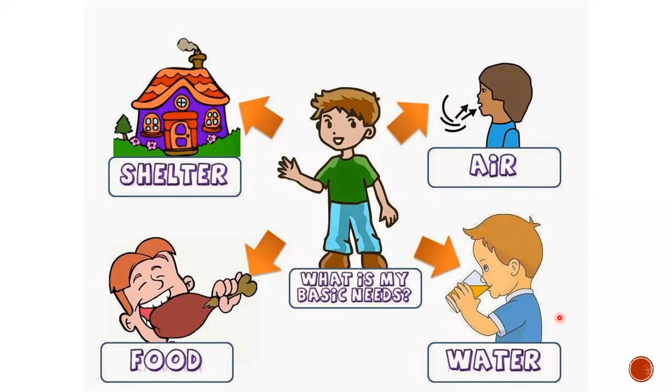Initially we used to have load-bearing walls and thatched roofs which cater to at least 4 to 5 people. Now, on the same place, we are doing multi-story and high-rise buildings which cater to a much bigger population. So when I talk about density of population, in initial stages it was very less, and the shelters were very different. Now, with the increase in population and advancement in industry market practice, the role of shelter is going to play a major role. So how can a structural engineer help people or human beings achieve this basic need? That's what this presentation will talk about.

Coming to the overview of structural engineering: what is a structural engineer? What do we do? What do we design? These are the three topics which we are going to cover in this presentation.

What is structural engineering? Engineering is basically the mathematics of any design. It might be structures, it might be electrical, it might be mechanical. Every engineering discipline is nothing but the mathematics of design.

Coming to the basic need of shelter, there are four people who play a major key role in getting things executed. First, the architect is the one who visions or perceives the ideology of building any structure, bridge, or monument. So the architect is where the vision starts, and next comes the engineer, who adds the mathematics to the design and then makes it executable.

Next comes the coordinator, who coordinates between the structural engineer and the architect, and the marketing person, who actually sells your idea. So it's not always just about building your idea; you need to sell it. Doing a number of buildings doesn't serve any purpose. You need to build with a proper vision, proper mathematical design, and then sell your idea so that your building gets sold to the required population.

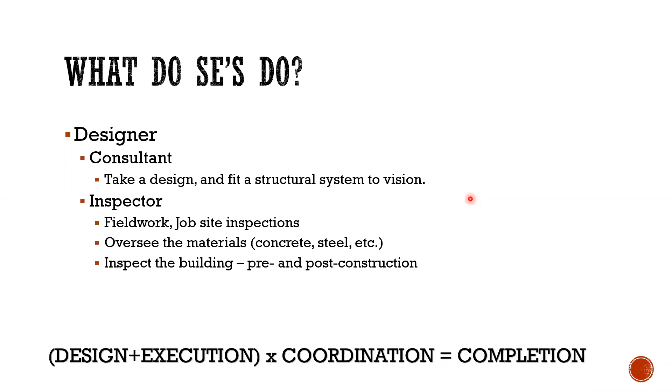So what do we design? As I told, we get the vision from architects, and then we start quantifying the loads based on the vision, then estimate the material capacity. Material capacities are properties of the material, and loads depend on the vision given by the architect. The main part of structural engineering is to correlate between these loads coming from the vision and the estimation of material capacities. For what load, what material is required, and for what material capacity, how much load we can take. It's a balancing between loads and capacities that a structural engineer always works on.

And altogether it's about a safe and sustainable environment. We need safe structures and sustainable structures which have a life of 50 years or 100 years depending on the importance. When I talk about sustainable, it refers to the life of the structure. It should not happen that I build a structure which is safe for 1 year and after 1 year it is no longer valid. That should not be there. It should be safe and it should be sustainable also.

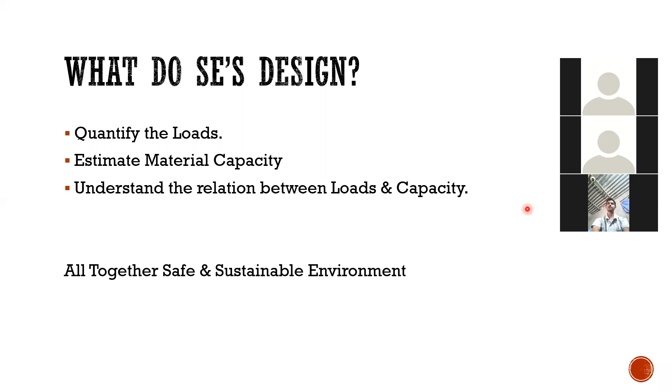So when I talk about loads, let's go a little brief into loads. The estimation of loads and the estimation of material capacities is what majorly a structural engineer does. Coming to the type of loads, we have many types. You may already be aware of point loads, UDL, UVL, uniformly varying load. I'm not going into much detail of this, just a brief of what the types of loads are.

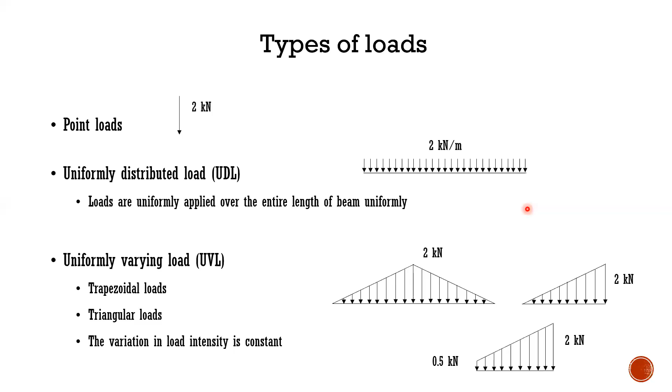Loads are nothing but applied on the structure. Coming to forces, what is the difference between load and force? Load is the thing applied on a structure or a member. Coming to force, what is a force? It's actually the resistance created. When I'm applying an actual load, if there is any resistance, then the force will be created on the member. So it's actually resistance created on the member.

Suppose I'm applying load on a chair which is having wheels mounted. What happens? There won't be any resistance, so there is no force getting transferred to the chair. Or if I'm pushing a car which has zero friction between the tire and the road, assume I'm applying so much load, but there is no friction being generated, so there is nothing the car is going to get. It will be moving easily because there is no force getting transferred on it.

Suppose if I'm having a chair which has a wall in front of it and I'm trying to push it, then what happens? The chair will start squeezing itself. That's where the force is getting transferred to the chair. That's the difference between load and force. Load is actually what you apply, and force is what it actually takes. So if I'm applying a load, it doesn't mean the load is always getting transferred to force. Force is actually how much resistance is generated, or how much is getting transferred upon it. That's the difference between load and force.

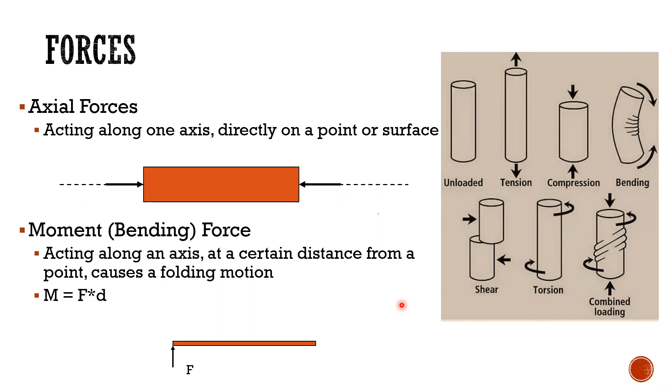Coming to axial force, again tension and compression. As you see on the right side top, when you pull and start making the member elongate, the member will start shrinking at the weakest point, and at peak capacity, it will break. That's how tension works. If you take an elastic rubber and start pulling on both sides, the tension will be created.

If you observe, necking will be forming at a critical point where the element will break. So that's where necking is critical in tension.

Coming to compression, there are two types: collapsing of the element, which means crushing, so the material starts crushing due to the compressing force. That is collapsible failure.

The other way is buckling, which is for longer elements. When you are applying... let's take an example.

What happens is, when I take a block and apply force on the top and bottom, it will start to crush. And if I do the same size block but with a bigger height, before it crushes, it will start bending. This is called buckling.

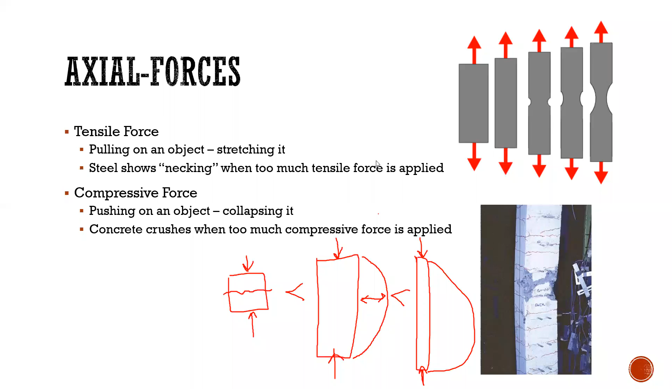So briefing one more time: tension is when you are pulling things away from each other, and compression is when you are pushing things towards each other. Bending is an indirect phenomenon involving tension and compression.

This is bending. When we call it bending, the top fibers will be in compression, pushing towards each other, and the bottom fibers will be in tension, pulled away from each other. So this is the way bending works.

It's an indirect compression and tension where the lever arm generates the bending moment. So bending is slightly different, but it still involves the direct forces of compression and tension. Bending is indirect, where the couple of tension and compression generates the bending - it's a combination.

Torsion is completely different - it's about rotation about its own central axis. That's where torsion differs from bending.

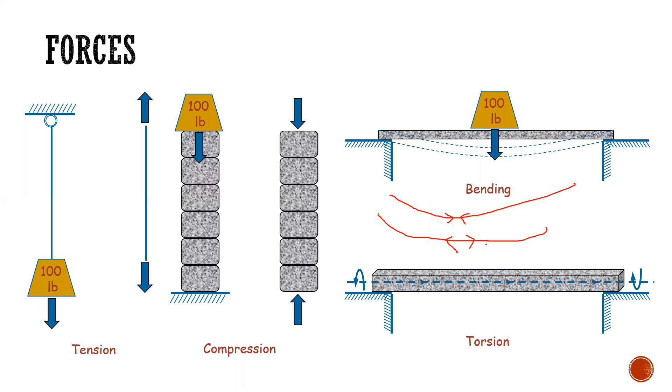So we discussed forces on individual members. Now we'll discuss forces on the overall member, like a building - what are the types of forces? Coming to forces on individual members, there are many types of loads: UDL, point load - those are the types of loads. Now coming to forces, what types of forces can any building attract?

It can be anything, like gravity. When we talk about gravity, it's nothing but the law of motion, the gravitational force - it's m into g, mass into gravitational pull. The g is 9.81, and mass is the mass of the body, any item which has mass.

Static force is again divided into two types: one is fixed static, like walls, floors, thickness, concrete, dead weights - all these are called static force.

The other is dynamic - not dynamic actually, these are changing due to time. It's not dynamic because of unnatural events, it's because of changes with time - people may go there or not, furniture may move from here to there. These are dynamic forces, not related to dynamics with respect to time of the building, but with respect to the life of the building.

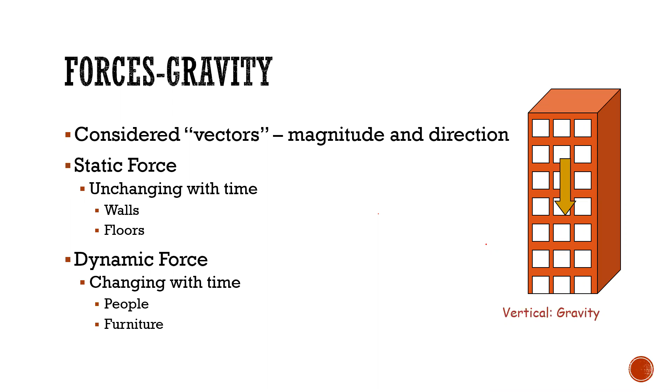Today a building may serve as a residential building; tomorrow it can be converted to office. So the loads of the office will change, but the dead weights and walls won't change. That's where static and non-static forces are different. These are the two types of forces in terms of gravity, where some change with time and some don't, because of the life or usage of the building.

Other forces are unnatural forces, not known to everyone when they will come. It might be earthquake when you talk about seismic, or wind and cyclones when you talk about wind loading. So what is the difference between static and lateral forces? These are actually dynamic, because you don't know when they will occur.

When we talk about static, it's with respect to the time when the load is acting - there is no change in the load. Suppose a man standing on the floor at t=0 and t=1 second, the load is the same because the man has the same weight, so the gravity forces are same.

But when we talk about seismic, what happens is your building starts shaking. Depending on the building shaking, the time period of oscillation depends on the building geometry. But the shaking vibration depends on the natural layers underneath the building - that decides the shaking vibration caused onto the building.

At t=0, it might be 1 kilonewton. At t=1.1 second, it might be 0.1 or it might be 2 kilonewtons, depending on the building behavior or the location where your building is situated.

Zone factor is the one thing we call based on the geography of the India map. They have divided the Indian plateau into 4 zones: 2, 3, 4, 5. Zone 1 was there initially, but that was discarded later after the Bhuj earthquake, so zone 1 is out of the picture.

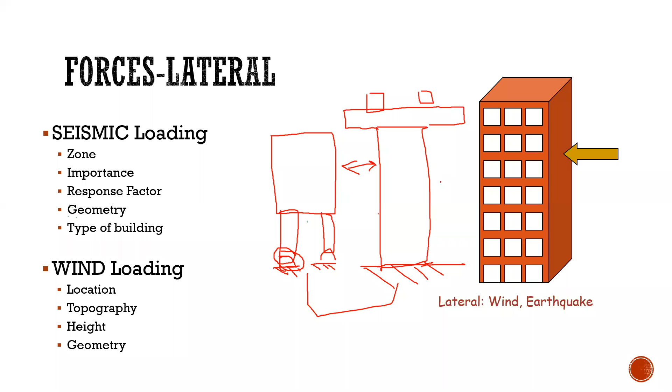So when wind occurs, if you allow it to pass through, there will be no force transferred to the building. That's where I say load gets transferred to force only if it is being obstructed. If it is not obstructed, there is no force transfer. So that's as simple as that.

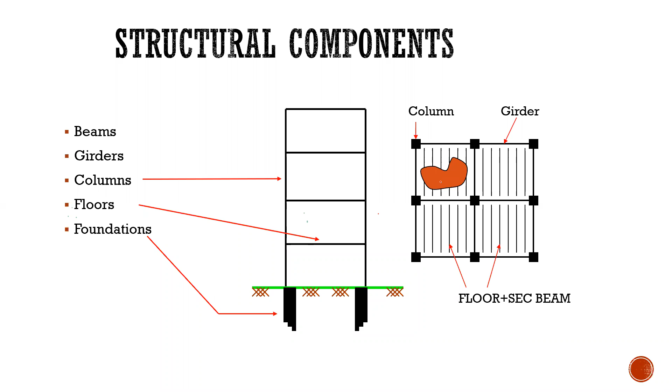So now coming to one building, let's take a small building. What are the types of building components we have? It might be beams, where the first one is slab, and slab is connected with the primary and secondary beams, then primary beams, and then columns, and then load is transferred to the foundations. So these are the typical parts of any building component in terms of structure.

So how is the load path being transferred? The load is always getting transferred from the slab only, since the slab is the one in direct contact with the load. The slab will transfer the load to the beam, the beam will transfer to the secondary beam, which transfers to the primary beam, and then the primary beam will transfer to the columns, to the foundation, and the foundation to the soil. That's how the load transfer mechanism works: slab, then beam, then column, then foundation, then soil. This is the basic load path everyone needs to understand for any type of building.

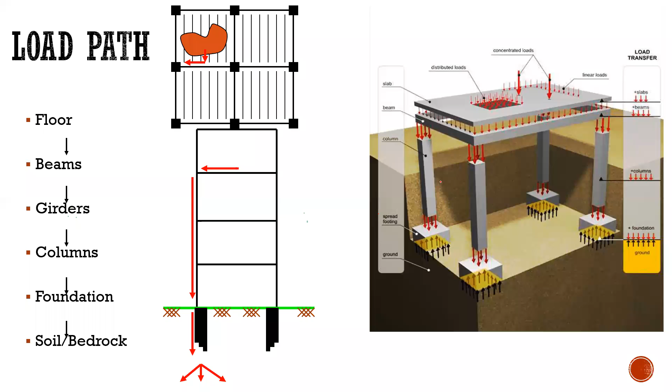So we discussed building loads and everything. Now let's talk about materials. What are the types of materials we can use when building a building? That might be timber or wood, RCC meaning reinforced concrete, or post-tension, pre-tension slabs, or steel structure, composite structure, and fiber reinforced structure. So these are a few types of construction; there may be more, but we'll talk about the main ones.

Coming to wood construction, it is not predominantly used in India, only for aesthetic points where someone wants to create something lavish or beautiful in terms of view. There, wood construction is predominant. In India, we use wood as a finish material, not as a structural material, because of its properties and the quality of wood we have here. It's lightweight, and it's more used in American and European countries because of that lightweight behavior and the aesthetics it brings to a building. In India, its structural use is very low; it's more used as a finish material, like on the floor as wood tiles or flooring, so you get that feel of wood.

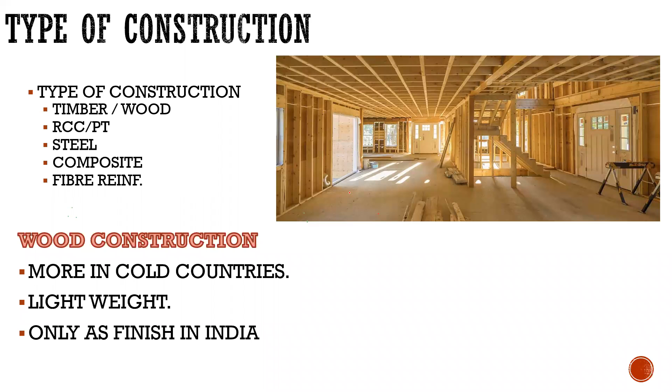This is the predominantly used construction in the current Indian market: reinforced cement concrete, RCC construction, where concrete and reinforcement share the compression and tension. Concrete takes compression and reinforcement takes tension. But this has more weight - when you compare the same structure with the same utility, the dead weight of RCC will be much bigger than all the other types of construction we discussed.

PT, which is pre-tension or post-tension, slightly reduces the weight of the concrete structure, but it's still in the top two. RCC will be number one in terms of weight generated on the soil below, and PT will stand in second place. Composite, steel, and wood come in subsequently, adding less weight on the substructure. So when you have very loose sand or very weak soil, building with RCC will add more weight to the structure, which will kill the capacity of the soil - that much dead weight comes in without any real usage.

The dead weight is so much - dead weight is nothing but what's needed to keep it in place, and you need more of it than the actual load you're carrying. Suppose I take an RCC building with a 150 thick slab - that's ultimately 375 kg per square meter of dead weight. And what is the live load we design for? Say 200 kg per square meter. So I'm designing for 200 kg per square meter of live load, but my dead weight itself is 375 - almost double the actual live load I'm designing for. This is meant to provide for live usage like people's furniture or anything, but the dead weight is so high that the live load becomes very nominal in comparison, because of the RCC dead weight we get.

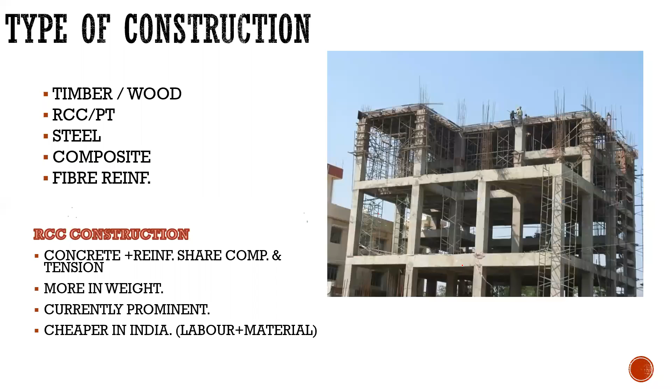Okay sir, so in India there is one more component before we talk about labor and material: time. India is more focusing on time now, because when we talk about RCC, one slab will take suppose 20 days, but when you talk about steel structure, it will take just 4-5 days to erect. So that's where the time component gets added. When I talk about labor, material and time, India is now cashing on time, because India wants a quicker building due to market requirements.

Like if I'm building a commercial complex where my rent is much bigger, then the time factor comes into the picture. I want the building faster than spending money on steel or composite, because then comes the effectivity of time.

When we talk about labor and material, those still remain as labor is cheaper and material is costlier in India. But the time factor is where I can sell my building much quicker. Like if I'm doing steel construction, I will sell my building 3 months in advance, but the cost of steel structure is 1.2 or 1.3 times the RCC. Then I will take a call: what is the 3 months rent I am going to get by making it early? If that 3 months rent is more than the 20-30% I'm investing on steel construction, then I will go with steel construction.

So people have understood the importance of time, and the Indian market has the potential where time is playing a key role. If I'm delivering faster, I'm the one who is going to get good money, by selling it or keeping it as brand value, I can be quicker. So that's where the Indian market started investing on time, and that's where steel construction has grown in India.

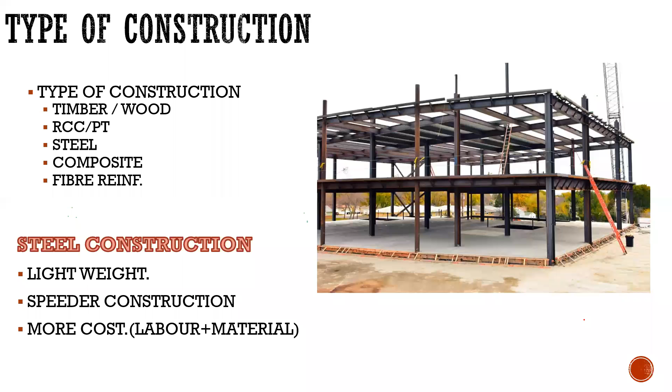So that's where the Indian market is lagging behind, thinking whether to go for higher cost or quicker construction. And somewhere in between comes composite construction, which is nothing but steel and concrete together. It has the benefits of both: lesser time, and cost in the medium between steel and concrete. This is getting more prominent in the current market. If you see in the coming 10 years, composite construction is going to lead the market more than RCC, because it's quicker and comparatively less costly than steel.

One more thing: when we are walking on steel, the vibrations or the human comfort on steel is very less. If you walk on any steel bridge or concrete bridge, you will feel the difference. When you walk on a steel bridge, you feel vibrations, your buildings are getting vibrated. But with concrete, it's very nominal that you feel the vibration.

In concrete, your dead weight is so high and your live load is very nominal. So your concrete dead weight is so high that your oscillations won't be counted in the building. You cannot feel the vibration of the building or bridge when you're walking on concrete.

But comparing to steel, the live load of the human or vehicle is comparatively same as your structure weight. So then the frequency is very less, and you will feel those frequencies by yourself. So the discomfort, even though it is not going to collapse, you will feel the discomfort when you are moving on a steel bridge or steel building. That's where the discomfort is there in steel.

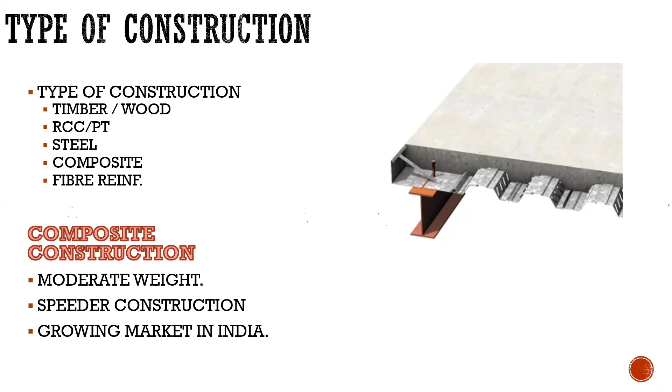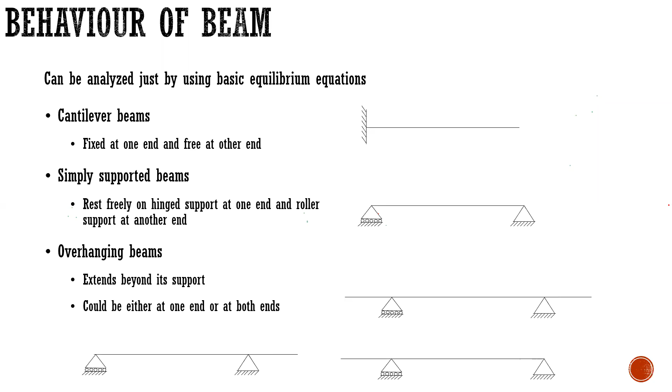Coming to beams, now we will go in detail of each individual element: beam, slab, concrete, beam, slab, floor, and foundation. Coming to beams, you all know it's simply supported, continuous, fixed, overhangs - these are all types of beams. These are the localized behaviors; I'm not talking in the overall picture of the building. It's locally what are the types of building beam behaviors we can call.

You all know about shear force and bending moments. It's nothing but a resistance created by beam force, getting created because of the slab, because of the load applied, and because of the resistance getting generated. Without resistance, there is no force; with resistance only, there will be force generated. Shear force is created because of the resistance to shear by a beam, or bending moment is a force created because of resistance to bending of that particular beam. So shear force and bending moments are actually the resistance, not the force - it's resistance because of the load applied.

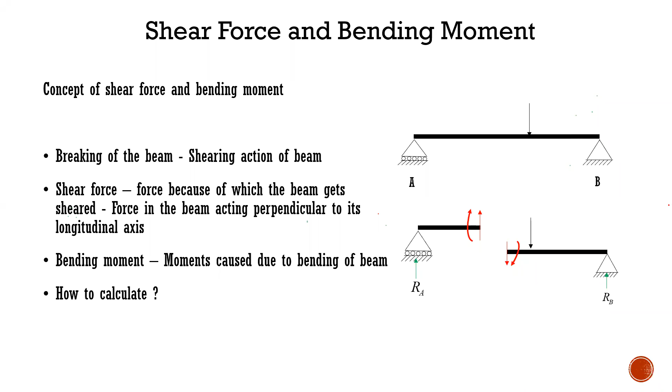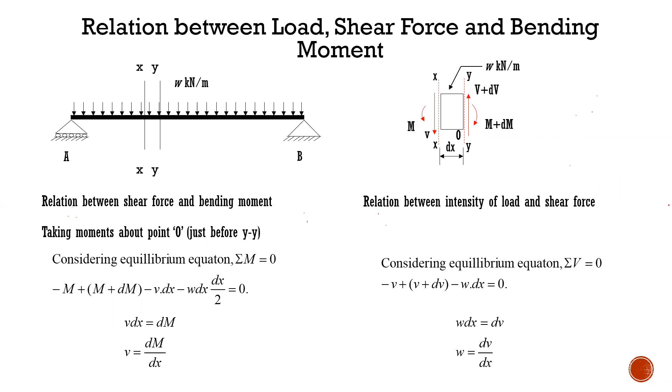So when I say bending, the compression is at the top and tension is at the bottom - that's where the simply supported bending theory comes. If you see the types of beams, we are talking about cantilever, simply supported, overhanging, continuous, fixed, and propped cantilever and simply supported. Now coming to this, the bottom shapes are actually the deflected profiles - the cantilever will deflect like this.

So this is how the cantilever will deflect, because it's getting a fixed end here. It will have zero deflection and zero rotation here, and which is all bending. And if you talk about simply supported, it has zero deflection at the ends, but it's going to bend maximum at the middle.

What is overhang? It's nothing but when the load is applied on spans that are cantilevered over the simply supported beam. Then the beam will have a negative rotation at the supports and positive rotation in between at the bottom. So this is how the overhang beam looks like. And this is how a continuous beam looks.

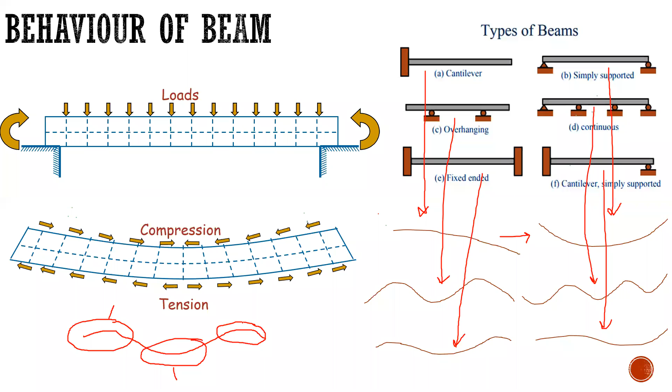Coming to slabs, there are multiple types of slabs, like one-way slab, two-way slab, flat plate, waffle slab - these are the much broader types of slabs. But when we talk majorly, it's always a one-way slab or two-way slab. In a one-way slab, the load will be distributed on one direction of the slab. Like if you see this slab, the load is getting transferred to this direction only. It's not getting transferred to the other direction.

But if you talk about a two-way slab, it's getting transferred to four directions. How does this load get transferred? These loads get transferred based on the yield line theory.

What is yield line? It's about a failure mechanism. You can take any paper and understand the failure mechanism very easily. Take a paper of square shape and apply a point load at the center. You will see that the paper starts bending in this direction.

It's a square paper, so the load will be distributed like this. This part of the load will be distributed to this side of the beam, and this part of the load will be distributed to this side of the beam. So that is how, depending on the failure theory or yield line theory, your load is getting transferred. If I take the same thing as a rectangular paper, what happens if you apply load at the center? That will behave something like this.

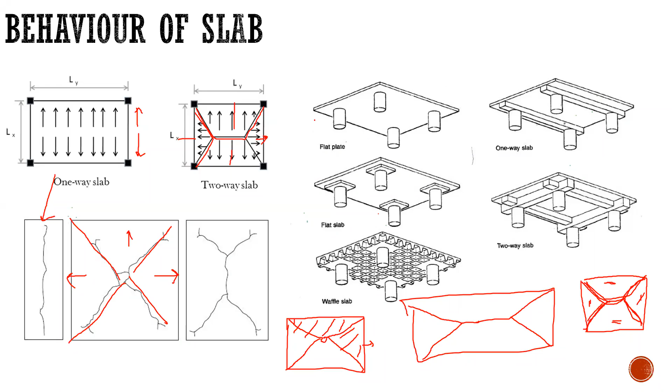Coming to the column, which we talked about earlier, the column might fail by buckling, compression, or shear - these are the three different failures we typically observe in any column. For buckling, it's more about the bending moment or the height of the column, depending on the geometry ratio, so the reinforcement plays a major role there.

When you talk about compression, the concrete plays a major role in compression failure, so you need more concrete dimensions or an appropriate grade of concrete to avoid this. Your stirrups matter too - when concrete is in compression, the steel ties the concrete in place, so improper provision of stirrups can lead to compression buckling of your steel.

So when I talk about the reinforcement provided for a column - the longitudinal steel helps avoid buckling or bending of the column, but the transverse steel helps with local buckling of stirrups or shear of the column. Local buckling happens when your column is long and under compression loads, but the reinforcement is slender, so it starts to buckle. To avoid this buckling and to avoid shear failure of the column, stirrups are provided. This is how and why the concrete, reinforcement, and stirrups are linked to the loads being applied or forces transferred.

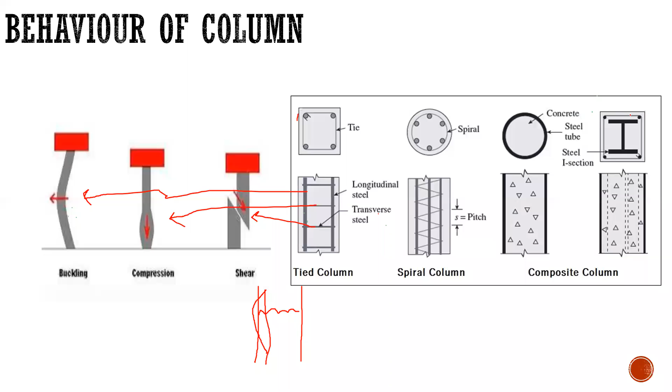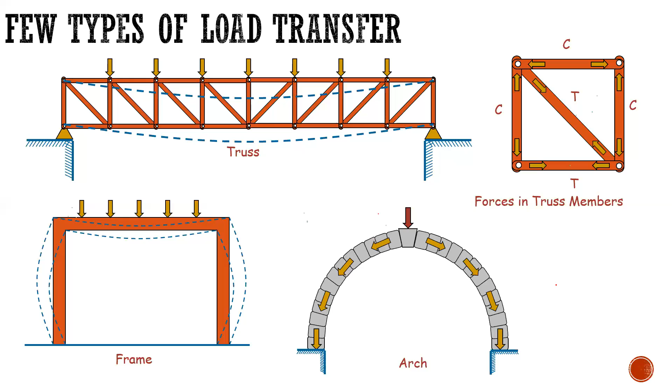The arch actually works on all compression. Whatever load you apply, it will transfer into compression only. That's where arch works. Initially, in predominant areas where rocks are used in construction, they used arch technology, where all loads are transferred by compression, because rocks are stronger in compression. But when you talk about rocks in tension, they won't help you much. So that's where the arch methodology was used much longer in the earlier days, not now.

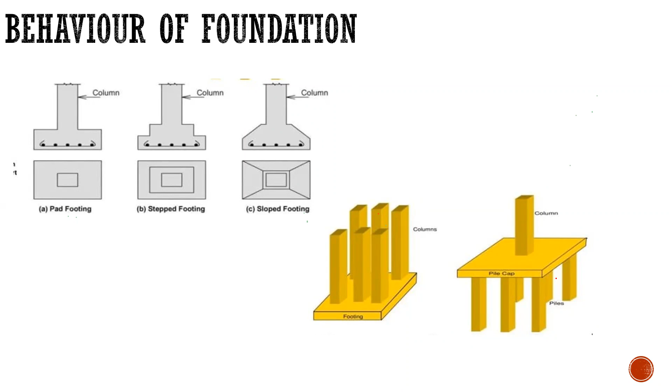So that's the end of the presentation. Any queries, please feel free to ask. If I'm a little fast, please avoid that, and please ask any queries.

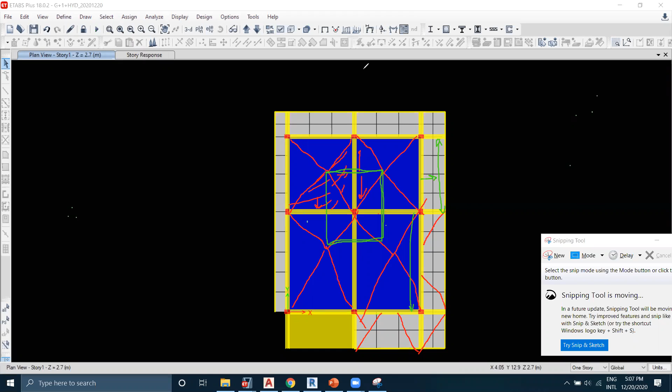ఫిక్స్ చేసుకున్న తర్వాత అనలిటికల్ మోడల్ ప్రిపేర్ చేసి దాంట్లో లాటరల్ లోడ్స్ అంటే ఎర్త్క్వేక్ లోడ్స్, విండ్ లోడ్స్ వేసి రన్ చేసుకుంటాం. ఇప్పుడు నేను రన్ చేసింది, ఇది ఒక ఫ్లోర్ మోడల్.

ఒక ఫ్లోర్ మోడల్ ని రెప్లికేట్ చేసి దీన్నే డూప్లికేట్ చేసుకుంటూ వెళ్ళి 3 ఫ్లోర్స్ క్రియేట్ చేసుకుంటాం. 3 ఫ్లోర్స్ లేదా 2 ఫ్లోర్స్, ఆ బిల్డింగ్ జామెట్రీ బట్టి నెంబర్ ఆఫ్ ఫ్లోర్స్ డిసైడ్ చేసుకుంటాం.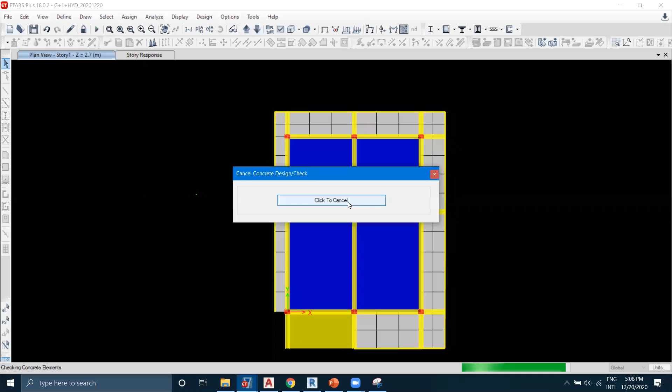సో మనకి ఫస్ట్ కాన్సెప్ట్ వైజ్ డైమెన్షన్స్ అనేవి మాన్యువల్ గానే వచ్చేస్తాయి. కాకపోతే వచ్చిన సైజెస్ కొంచెం అటు ఇటుగా ఒక 10 to 15% 3D మోడల్ ప్రిపేర్ చేస్తే ఎగ్జాక్ట్ తెలుస్తాయి. మనం మాన్యువల్ గా చేసే అజంప్షన్స్ వేరు, అనలిటికల్ మోడల్ ప్రకారం లోడ్ పాత్స్ అన్ని అలాగే ఉంటాయి.

కాకపోతే ఇంకా బెటర్గా, మాన్యువల్ ఎర్రర్స్ లేకుండా ఉండటానికి ఈ 3D మోడల్ ప్రిపేర్ చేసుకున్నాను. ఇది G+1 బిల్డింగ్. గ్రౌండ్ ఫ్లోర్ లో స్లాబ్ ఏదీ ఉండదు కాబట్టి ఓన్లీ ప్లింత్ బీమ్స్ ఉంటాయి. ఫస్ట్ ఫ్లోర్ స్లాబ్, టెర్రస్ స్లాబ్, దాన్ని బట్టి స్టేర్ కేసులు అన్ని వేసుకున్నాను.

దాని తర్వాత బీమ్ సైజులు అన్ని తీసుకొని దాంట్లో చేశాను. ఇప్పుడు దీని నుంచి రెయిన్ఫోర్స్మెంట్ ఎంత వచ్చిందో ఎంత కావాలో వచ్చేసింది. ఇక్కడ లోడ్ ఒక సేమే, కాకపోతే ఇక్కడ 700 mm² స్టీల్ వస్తుంది, ఇక్కడ 900 వస్తుంది, ఎందుకంటే ఇక్కడ స్పాన్ ఎక్కువ, ఇక్కడ స్పాన్ తక్కువ.

నెక్స్ట్ ఈ బీమ్ తో కంపేర్ చేస్తే ఈ బీమ్ లో ఎక్కువ వస్తుంది, తక్కువ వస్తుంది, ఎందుకంటే ఇక్కడ క్యాంటిలివర్ లోడ్స్ ఎక్కువ ఉన్నాయి, టార్షన్ ఎక్కువ వచ్చింది. అందుకని ఈ బీమ్ లో స్టీల్ ఎక్కువ వస్తుంది, ఈ బీమ్ లో తక్కువ వస్తుంది. ఈ బీమ్ తో కంపేర్ చేసుకుంటే లోడ్ ఎక్కువ కాబట్టి, స్పాన్ ఎక్కువ కాబట్టి దాని తగ్గట్టు స్టీల్ ఎక్కువ వస్తుంది.

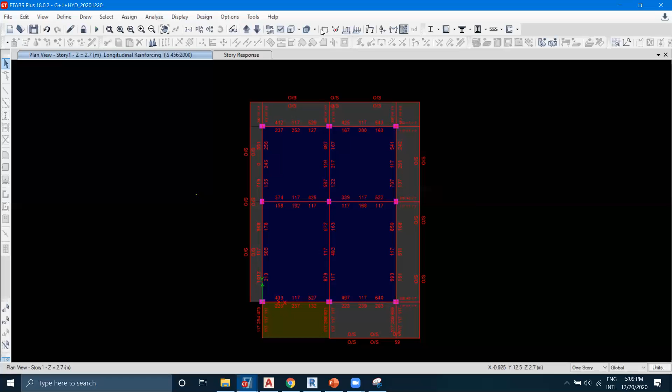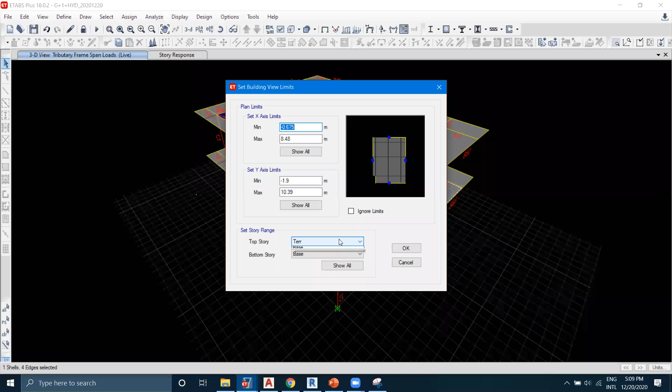నేను ట్రయాంగిల్ ట్రెపిజియం గురించి చెప్పాను కదా. ఇదేమో స్క్వేర్ ప్యానల్, ఇక్కడ వచ్చే సిస్టమ్ కనుక ట్రెపిజియంలు ఎక్కువ వస్తాయి, ఇక్కడ వచ్చేసరికి కొంచెం ట్రయాంగిల్ వస్తుంది. సో ఈ లోడ్ వచ్చేసరికి...

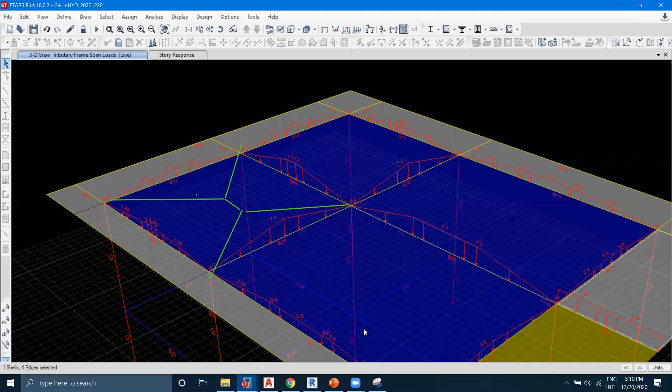ట్రయాంగిల్ ఎక్కడికి వెళ్ళిపోయింది, ఇది ట్రయాంగిల్. ఇక్కడ వచ్చేసరికి ట్రయాంగిల్ లోడింగ్ వచ్చింది, యూవీఎల్ వచ్చింది. ఇక్కడికి వచ్చేసరికి యూవీఎల్ వచ్చింది, మధ్యలో కొంచెం యూడీఎల్ వచ్చింది, ఎందుకంటే ఇక్కడ హారిజాంటల్ ఎక్కువ. అదే ఇక్కడ చూస్తే చాలా ఎక్కువ ఉంది హారిజాంటల్, అందుకని ఇక్కడ చాలా ఎక్కువ వచ్చింది.

ఇక్కడ హారిజాంటల్ పోర్షన్ ఎక్కువ వచ్చింది కాబట్టి ఈ బీమ్స్ లో చూస్తే హారిజాంటల్ పోర్షన్ ఎక్కువ ఉంది. సో ఇదంతా యూవీఎల్, ఇది వచ్చేసరికి యూడీఎల్, ఇది వచ్చేసరికి మళ్ళీ యూవీఎల్. ఇలా సేమ్ అనాలజీ ఫాలో అవుతుంది, కాకపోతే ఇది కంప్యూటర్ బేస్డ్ కాబట్టి కొంచెం డిఫరెంట్గా ఉంటుంది అంతే.

ఓకే, నెక్స్ట్ మనం మోడల్ చేసుకున్న తర్వాత దీన్ని మళ్ళీ టెక్నీషియన్స్కి ఇస్తే వాళ్ళు డ్రాఫ్టింగ్ చేస్తారు. డ్రాఫ్టింగ్ చేస్తే మనకి ఇది ఫైనల్ బిల్డింగ్. ఇది యాక్చువల్లీ ఇందాక చూసిందేమో మీరు అనలిటికల్ మోడల్.

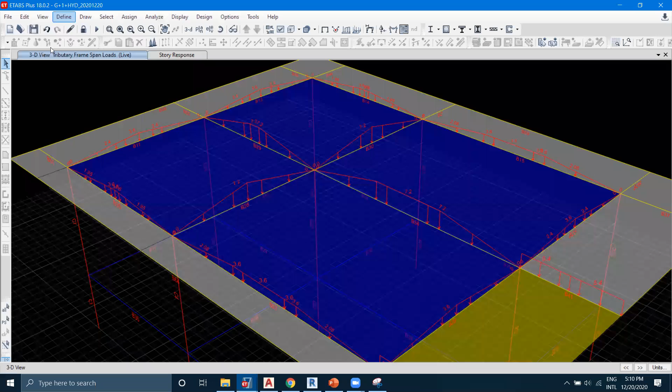ఇందాక చూసింది మనది అనలిటికల్ మోడల్. అక్కడ నెంబర్స్ రన్ చేసుకుంటాం, స్ట్రక్చర్ అనాలిసిస్ మోడల్స్ డిజైన్ ఇక్కడ చేసుకుంటాం. దాని తర్వాత దానికి డ్రాయింగ్ ఫార్మాట్ లో క్రియేట్ చేయడానికి మళ్ళీ మనకి 3D షేప్, ఇది వేరే మోడల్.

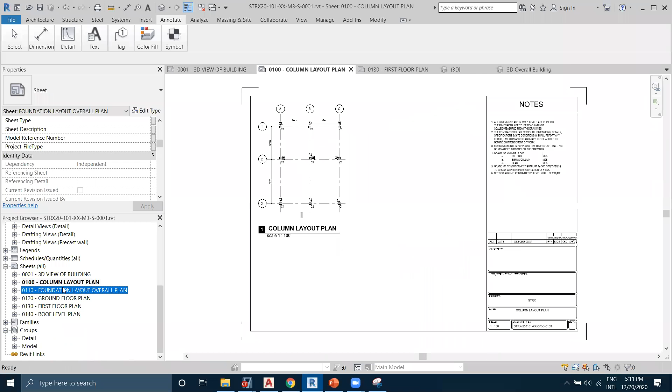సో ఇక్కడ 3D లో బిల్డింగ్ అంతా డ్రా చేసుకొని దాని తగ్గట్టు కాలమ్ ప్లాన్, ఫౌండేషన్స్ అంతా డిజైన్ చేసుకుంటాం. ఫౌండేషన్స్, గ్రౌండ్ ఫ్లోర్ లో బీమ్ సపోర్ట్, ఇది డ్రాయింగ్ అవుట్పుట్. మనం చేసే మోడల్ అది 3D మోడల్, అది అనలిటికల్ మోడల్.

ఇది డాక్యుమెంటేషన్, డ్రాయింగ్ ఫార్మాట్ లో క్రియేట్ చేయడానికి ఒక్కొక్క ఫ్లోర్ కి మనకు ఒక ఫ్రేమింగ్ ప్లాన్, డ్రాయింగ్స్ అవన్నీ వచ్చేస్తాయి.

సో దట్ ఈస్ ద మెయిన్ ప్రాసెస్ హౌ వి ఫాలో. మీకు ఇప్పుడు డౌట్స్ ఏమైనా ఉంటే అడగండి, లేకపోతే మనం వైండప్ చేద్దాం.